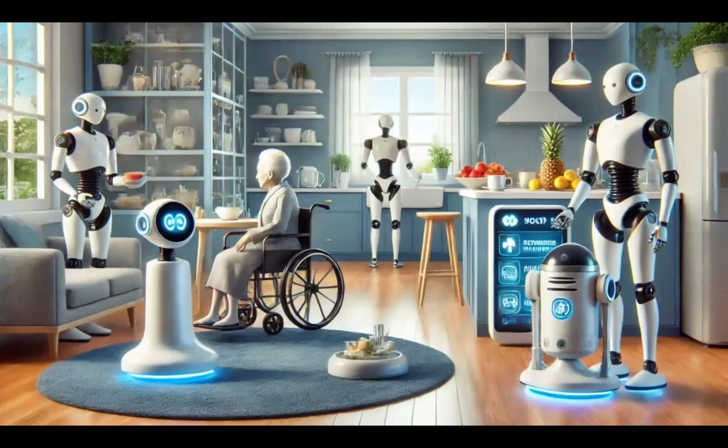And the same like this, right? I mean, of course, I think these are very good science fiction type goals. But we should also see where's the low-hanging fruit, where can we really deploy robotics today and every day.

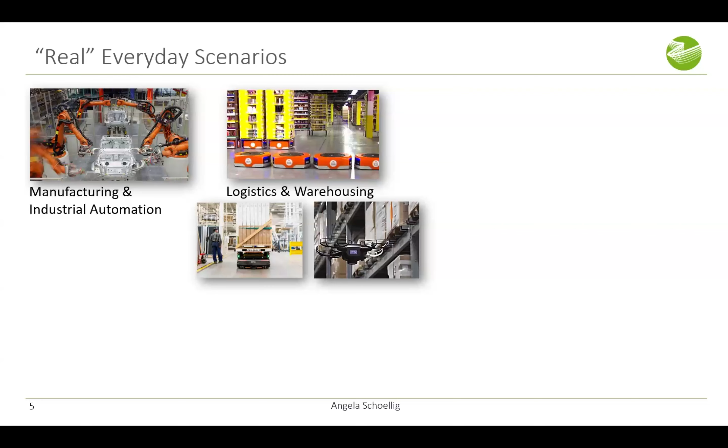And so when I talk about real everyday scenarios, of course, manufacturing industrial automation is everywhere, and it has been around for a long time, but logistics and warehousing is becoming more and more automated as we speak. And there are many interesting simple applications in service and consumer robotics, in healthcare, and in agriculture, autonomous vehicles.

So if you kind of see my talk today, the robot platforms that we work on are closer to those than kind of the futuristic everyday scenario. And I do think it's really interesting to see where robotics takes us next in the next years. And so the type of robots I will show you today, some of them are shown here.

So mobile manipulation platforms we are working with, so mobility plus manipulation, not with legged robots, but wheeled. But nevertheless, the algorithms are very similar. Robots that can be in more human-centered environments, such as kitchens, but a lot of the work we have been doing is also on self-driving, on the road and off the road, as well as on the sidewalk, most recently.

And so Sepehr is also here at the conference, so if you are interested in sidewalk robots that interact with humans, you can find him at the conference. And finally, we've also looked a lot at warehouses. So these are kind of the type of robots we have been working with, and what I also think are everyday robots.

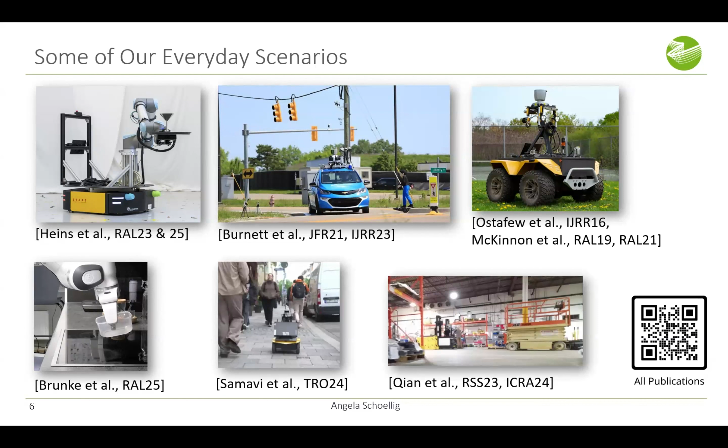Then the second part of the title, reliable and trustworthy embodied AI. This is something that is part of our research DNA for more than 10 years, because whenever we started deploying machine learning on real robots, we were caring about reliability and trustworthiness. And for us, this meant safety through constraint satisfaction for the most part.

And so I think this is the direction I want to go. So when I talk about reliable and trustworthy, this usually means safety through constraint satisfaction. And so there are three types of safety I'm going to talk about today. And one is dynamic safety or stability.

Geometric safety, which means, yes, you have to do the task such that there are no collisions. Okay? And I think this is the typical safety that we see also in safe robot learning, geometric safety.

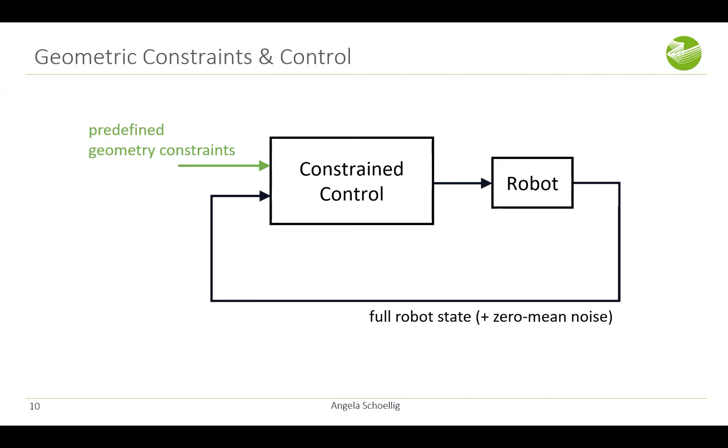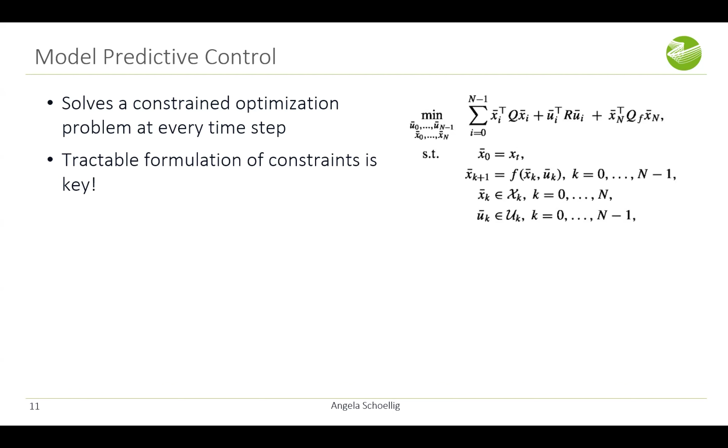And so the typical approach for this, and it was not a given that there's a simple approach to actually achieve this, is model predictive control, right? So in model predictive control, if you have the model of the robot and you have the constraints all given a priori, it solves the constraint optimization problem at every time step and can guarantee constraint satisfaction. But there's still a lot to be done, even in this case. And a tractable formulation of the constraints is key, or generally how you formulate this optimization problem such that you get efficient solutions that you can compute in milliseconds.

So I show you two examples that I just want to highlight. There's still work to be done here even when the model is known and the constraints are. And you see this in the two examples. One is on non-prehensile object manipulation, which I will show you in a second, and this was published in '23 and '25. And then we have another one on swarm coordination, where the geometric constraints are also other drones in the environment. And both of them tackle the constraint part very cleverly.

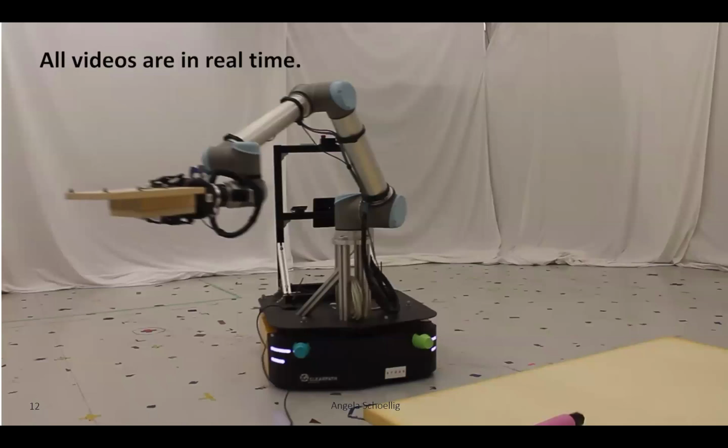And therefore, for example, the swarm coordination application is the fastest right now available, and we beat the best solution by a two-digit percentage. So let me show these just to show you we can still do a lot here. So this is what non-prehensile manipulation means. You don't grasp the object rigidly. This is always important because, usually, in the life of a robot, it needs to transport objects that are bigger than its own hands. Right? So the hands are usually very limited.

Taking the geometric constraint that these objects need to stay on the tray and not slip into account in a model predictive control approach, we can get very good and elegant motions for a variety of different objects without even knowing the objects in too much detail. So here we cleverly embedded the constraints in the control.

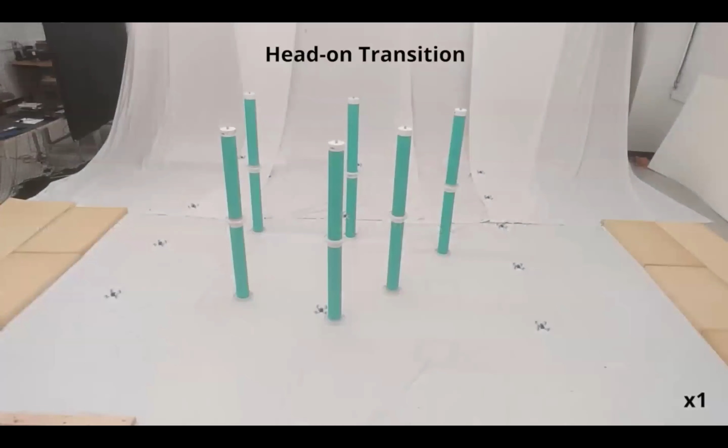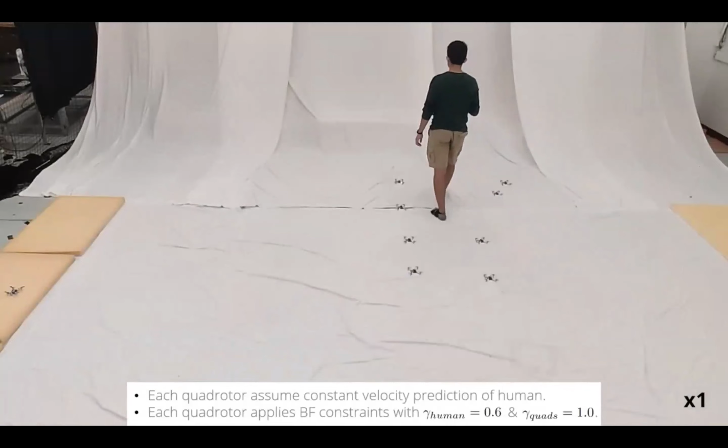Then the other one is the swarm transition one. So here you see drones transitioning in a constrained environment where there are obstacles, and they also have to avoid each other. So they can avoid static geometric constraints, the pillar, and handle dynamic constraints. We also show here where we track the person, and the drones can fly around and coordinate their motion to not collide with each other. This is all what I call geometry constraints or geometric safety.

Then in my group, with my whole team, we have optimized these types of approaches by expanding from just constrained model-based control to constrained learning control. So where we can consider geometry constraints, but we optimize the control, so the actual decision making of the robot, based on data. Okay? And there are different approaches. I just want to mention this. You can either have constraint satisfaction during the learning already or after learning.

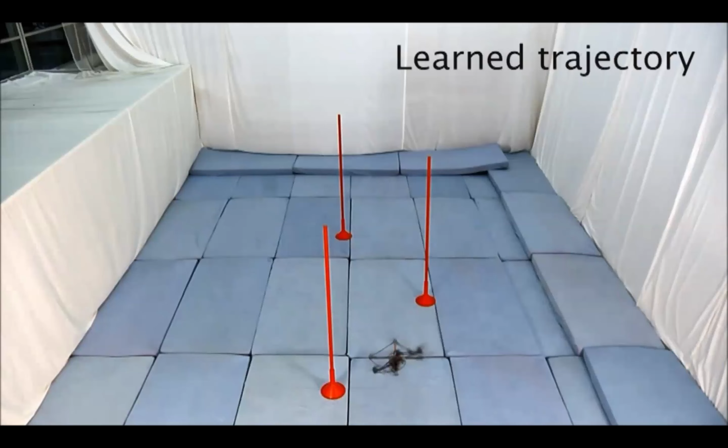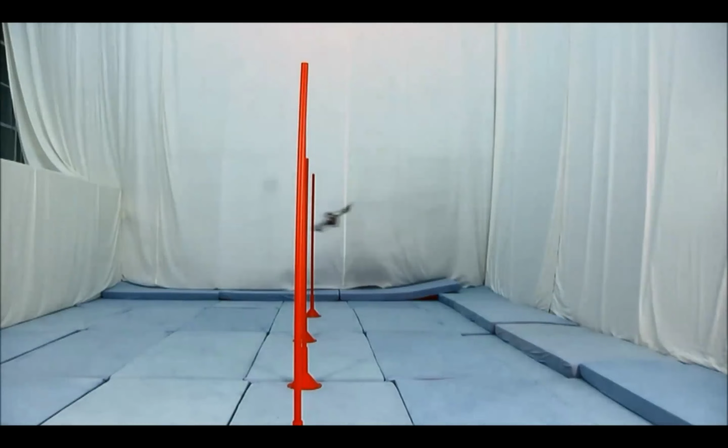And then we can do different configurations. And this is now almost 12 or 13 years old work. We can do other more clever things. So here, basically how this works is there is an inverse model learning block, the green one, that is attached to this general baseline controller, and the underlying controller guarantees safety and compensates for the random effects. And we really use the learning just to optimize performance, right? While still guaranteeing geometric safety.

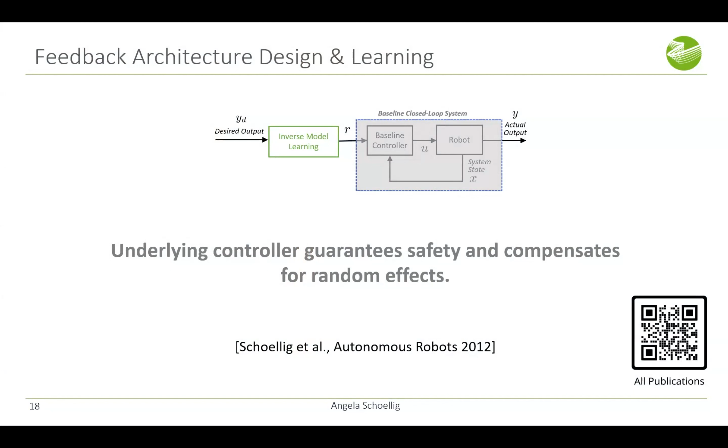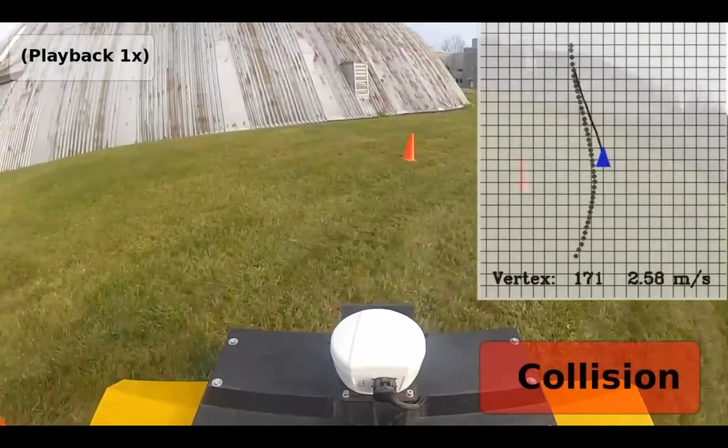You can do other approaches where you directly learn the probabilistic model of the robot. So you directly embed learning and decision-making into one block. And because we use a probabilistic approach such as Gaussian processes, you can also guarantee both constraint satisfaction and stability, so dynamic safety. And this is an example. If you have seen my work, you may have seen this before, but here we try to follow a path, and there's enough model errors such that a purely model-based approach would not work.

But then in this kind of uncertainty case, where we model the uncertainty in the system and learn from data, we can actually drive this path safely from the start. So this is actually guaranteed safety, under some assumptions of course, during learning. So we can guarantee constraint satisfaction during learning. Here in this case, it means to stay within the path bounds, which you see on the right plot. And you make sure that over a prediction horizon with a very high likelihood, you stay within these path bounds.

And then over time, you get to know the model better, and you can drive faster while still guaranteeing that the constraints are satisfied. Again, these are geometric constraints, right? These are bounds on the path that we have predefined before. We actually took this robot also through a long, kilometer-long off-road path. And again, there we had to predefine how wide the path is at every section and give this to the algorithm. But then it could learn and use the learning to improve performance while always guaranteeing safety.

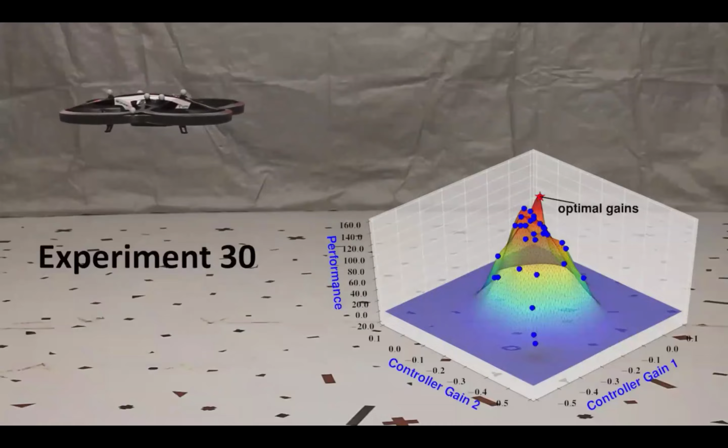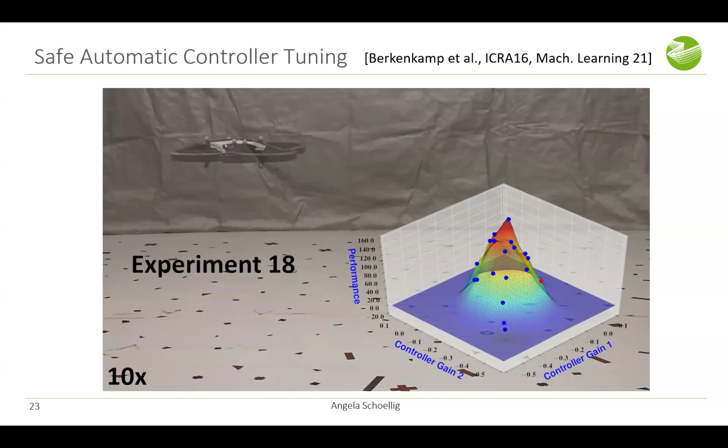And here's one other one I wanted to show. We can also use this same type of idea of a probabilistic learning model to safely tune controller parameters. And so that is also highly safety critical, right? Because if I try wrong controller parameters on a flying vehicle, it could crash. And so this type of probabilistic approach also allows you to do this. Here we had constraints that the vehicle should never get too close to the ground. And our approach guaranteed that.

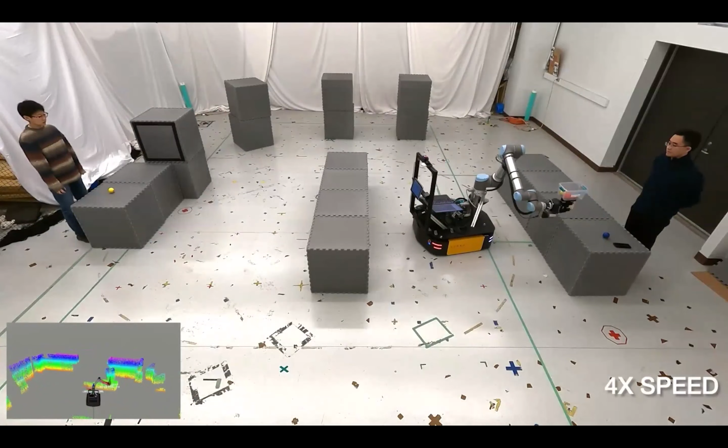Okay, so here you see at the bottom left how it is mapping in real time, and a mobile manipulator is doing a full body motion control in this environment and avoids the geometry constraints. And then here we even modify the environment such that we can simulate semi-static environments so that things change over time. And so here you see how the map is kept consistent and the robot performance is adapted based on the change in the geometry.

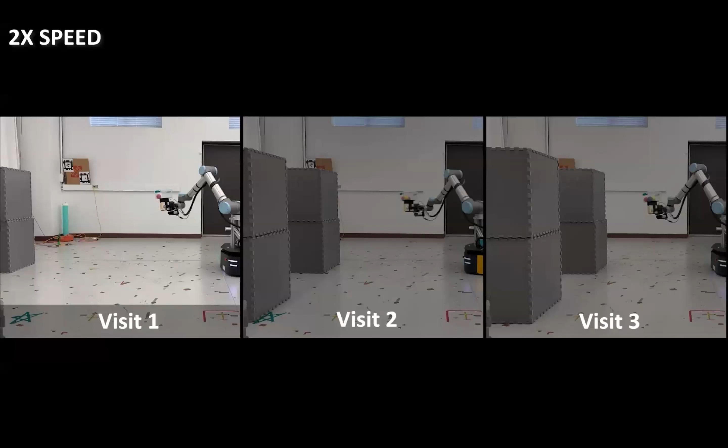So here the boxes shift again, and now the robot moves the arm again differently. So basically, we can deal with semi-static environments both on the mapping side as well as on the full body control side, and we can guarantee that the robot stays safe and satisfies those extracted constraints.

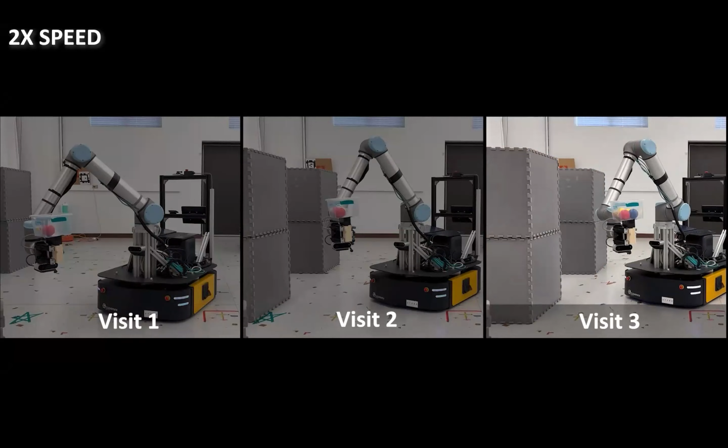And so finally, these are just basically the preparation to the main thing I think that is really interesting now. We know that we can extract this geometry from perception online. It's sometimes a bit challenging to do this in real time and also adapt your controller, etc. But I showed you we can even do this in semi-static environments, meaning environments where things change over time. Right, so environments where the approaches that I showed you at the very beginning, the geometry constraint control and learning, where the constraints are predefined ahead of time, would not apply.

And finally, the goal now is, can we really fully leverage what the perception system can provide us in terms of information to extract safe actions from this? And so the idea here is to derive safe actions from high-level semantic understanding using vision and language. And I would say we have just done some first steps towards this. But here the idea is that we also obtain a semantic context, usually from the sensor measurements of the robot, but maybe also more. Right? This could be other sources of information.

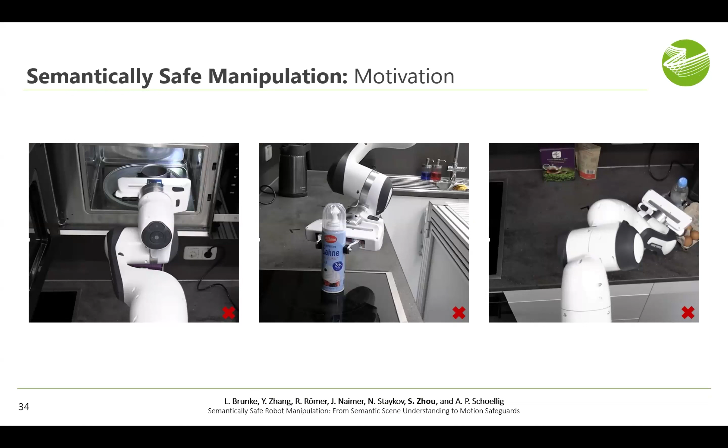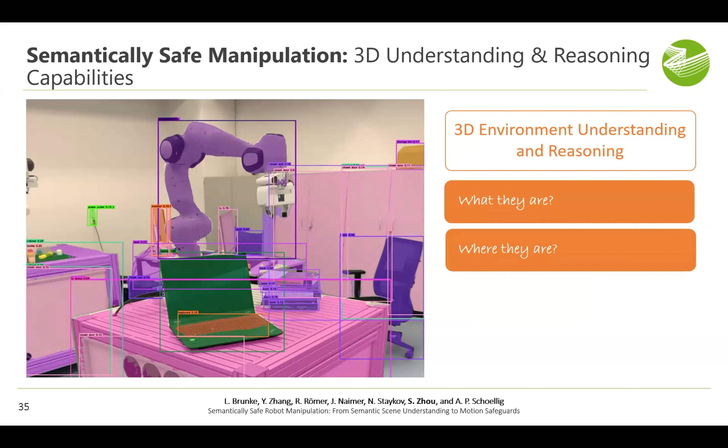So basically that we enable a robot to understand the environment and make good decisions based on understanding by knowing what the objects are and where they are in the environment around the robot. But then you could also extract more. You can extract how they are related or other questions, what is important for the task.

And this is basically where you can embed large language models as they are into robotics by just describing the scene to a large language model and asking it about what the robot should be careful about or what is important about this environment, etc. So I think vanilla large language models can be used as another source of information.

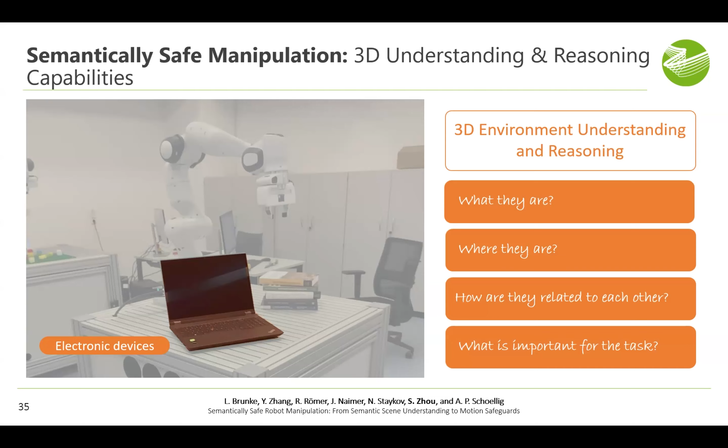So we don't use everything in a vision language action model, but instead we use vision, text, audio, possibly in the future touch or other information to understand the context and the semantics, like what the robot sees, like a human can do, and then use this for safe actions. And so I think this is the big question mark, how we then translate this back into safe actions.

And so here's what we have done so far in this first work. I'll try to slowly go over this. Yeah. And also check the time.

So in this first work, we take RGBD images and camera poses, and then do segmentation. Open vocabulary segmentation basically tells what you see, right? And then also where you see it through the environment map. So you have a 3D point cloud, and each set of points also has a label. For example, this is a laptop, this is a bottle, etc.

And then you can get semantic constraints through prompting a large language model. So for example, you can describe what you see, you can prescribe what you want to achieve, and then ask a large language model about possible semantic constraints.

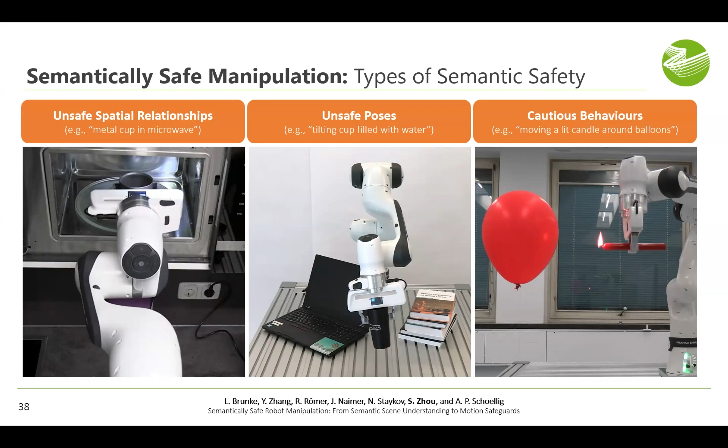And so what could these kind of semantic constraints be? It could be unsafe spatial relationships. For example, a metal cup should not go into a microwave. Could be unsafe poses, meaning that, for example, you shouldn't tilt a cup that is filled with water. Or it could be other kind of cautious behavior, like don't move a lit candle around balloons, things like that. So these are the type of unsafe behavior.

And then we map this into the control approach as real constraints. And so the details you can find in the paper, but basically we try to translate this kind of semantic understanding into something the robot understands. And I think this is also still an open question how you best do this. But we did this kind of with a control barrier function approach and still in an MPC setting, so model predictive control.

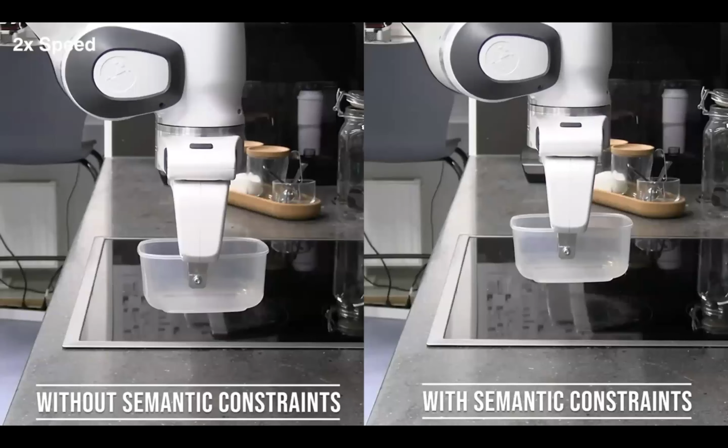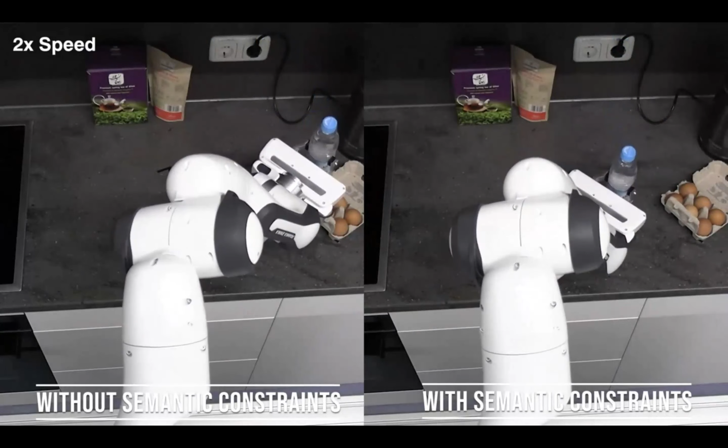And then here are some examples. So on the left, without semantic constraints, and on the right, with constraints. And you see, we only kind of modify the action to make it still safe. We don't actively design actions right now, which would be the next step. Right now, the operator wants to put the bottle on the eggs, but our semantic filter makes sure that this is not happening. Or the same here, like a plastic can on possibly a hot stove, right? So the semantic constraint would just say stop, could be dangerous.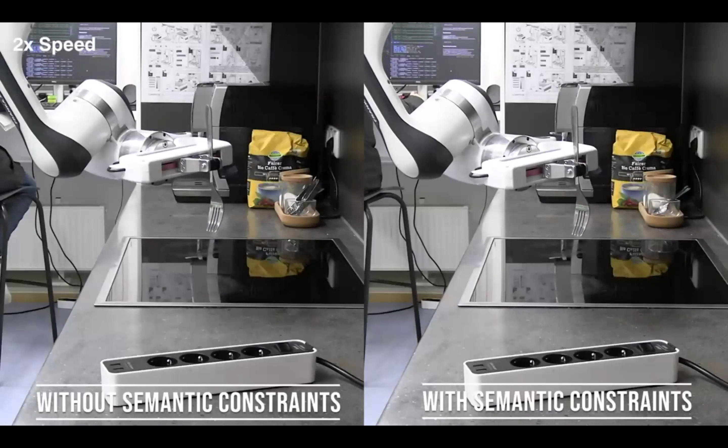Again, I think the next step would really be active motion design instead of just preventing bad things to happen. So here it stops the fork. So this was one of the works that we started in the direction of using the semantic understanding of the environment and translating this into safe actions. So going towards a semantic safety instead of just geometric safety.

So what is next? I think there's so much to do. I do still believe in a modular approach, given how diverse our environments are. I think right now we often don't have enough data to deal with the diversity, but approaching semantic safety in a dynamic environment, I think is very interesting. So right now extracting what all the objects are in the environment takes a bit of time. But in the end, we have dynamic environments where people and objects and everything moves.

Then even a broader context understanding and full multimodality. So right now we use vision and we use large language models, and those also separately. So there could definitely be a lot being done in terms of multimodality. And as I said, also in terms of active motion design.